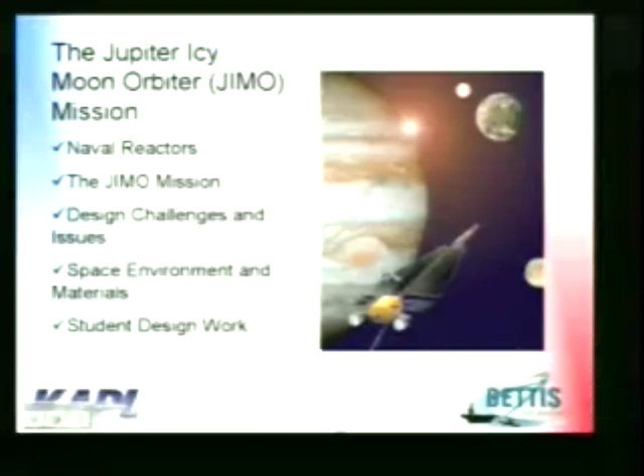Okay, naval reactors success story. At present, we have over 84 nuclear-powered ships, and most of them are submarines. The latest class is floating around. The smaller, cheaper version is the Virginia class. Well, it was the first one a couple of years ago.

The last one that I was involved in was Seawolf, which is a Bettis design. This is a KAPL design here. This is the underwater Death Star. Only a few of those were built. And we also do a lot of work at Bettis on Nimitz-class carriers. Los Angeles class has been around a while. NR-1, everyone's heard of.

Well, where are Naval Reactors facilities located? They're pretty much spread around the country. First of all, Naval Reactors headquarters is located in D.C. And there are two laboratories: Bettis in Pittsburgh and KAPL in Schenectady. These two laboratories are responsible for most of the design and engineering work.

Is the D.C. one NRL? No, that's not Naval Research Laboratory. It's Naval Reactors. They're part Navy, part DOE. It's 08. If you look at the NAVSEA command stuff, it's 08. And under DOE, it's under DOE NE. So from the Rickover days, it's a double-hatted organization.

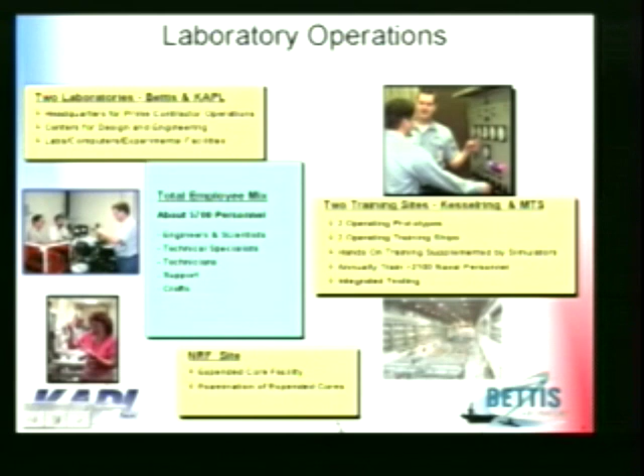Okay, the next thing I want to talk about is the JIMO mission. This is kind of a high-level overview of what JIMO is supposed to be. The plan is to launch the spacecraft no earlier than 2015. Some people say that's extremely optimistic, and I would agree. It's a very aggressive schedule. The trip to Jupiter will take approximately 6 to 9 years, depending on what velocity is at Earth's escape. If we have to spiral out, it's 9 years. If we can actually launch to escape velocity, it's something shorter.

The plan follows after the trip to Jupiter. They're planned for 4 to 6 years of science observations. We'll orbit each one of these 3 of the 61 moons, Callisto, Ganymede, and finally Europa. They're expected 4 to 6 months. They're going to orbit the science package for a while, changing orbits. And the end of the mission is somewhere in the 2025 range.

At the request of NASA, the National Research Council conducted a planetary science community assessment of what the priorities of the U.S. planetary research program should be for the next 10 years. It was called the Decadal Study. The study identified research at Jupiter as being the highest priority, and they had three objectives of this mission. One was the Jupiter Icy Moons Orbiter, and its purpose was to search for evidence of subsurface oceans on these particular 3 moons. It's also out to investigate the makeup of the moons, to learn about the history of the moons if they can, determine potential for sustaining life, not necessarily human life, but is there anything there at all. And also, they pointed out that this mission will require much more energy than you can get from an RTG or solar panels, and we'll talk a little bit more about that in a minute.

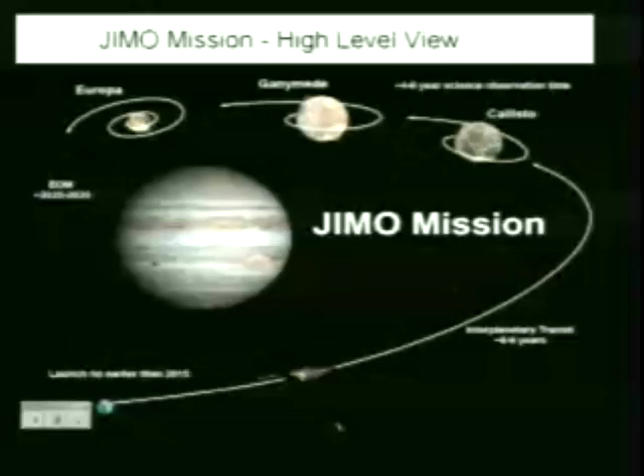Another source of power that's used a lot are RTGs. That's sending plutonium into space, always a political issue. And they're okay for low power levels. There are passive versions, there are dynamic versions where it's hooked to a Stirling engine. But again, you can get the long lives, but you can't get the high power levels. And you can't really use these for electric propulsion. There's not enough guts there, not enough oomph to keep things going. So it puts you out here in the fission energy range, ready for the deep space mission where you need electric power to get there.

I'll get this right when I'm done.

Yeah, excellent. So a little bit of background on JIMO. NASA conducted 3 Jupiter Icy Moon Tour studies between August 2002 and January 2003 to gain insight into mission concepts that would accomplish the Jupiter science objectives. The objectives were the ones we talked about before that were set out by the National Research Council in this decadal study. JPL initiated a feasibility study of a Jupiter Icy Moon orbiter mission in November 2002 and presented the results to the NASA administrator, Sean O'Keefe, in January 2003.

Included in the report was a project plan, an acquisition strategy, and contract RFPs, requests for proposals. Congress approved this in the FY03 budget, and work actually started on it in February 2003. At that time, 3 industry teams, the spacecraft vendors, were set up to go off and look at some feasibility studies. One was headed by Boeing, one by Lockheed Martin, and one by Northrop Grumman. They were supposed to do trade studies and report back on what this thing is going to look like, by December 2004. That was done early, and just last month NASA picked the prime contractor for the spacecraft, Northrop Grumman.

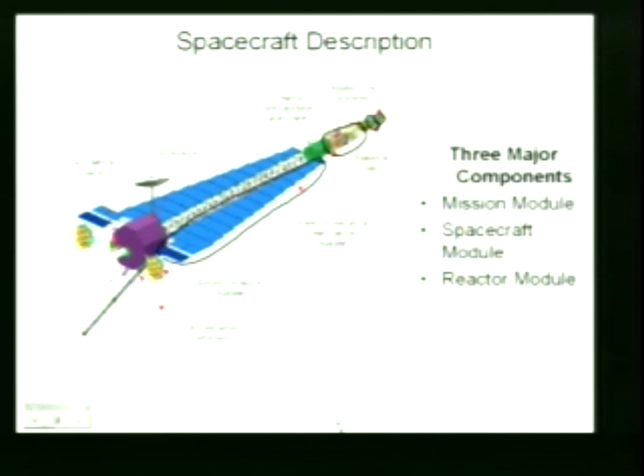And then these are radiators, all this back here. I'll talk a little more about radiators in a second because they're a major driver on weights and size. This piece back here, the mission module, is called the bus. And inside the bus is the science package, the xenon tanks; it uses xenon as its propellant.

It also has a lot of the power management and electric distribution system. It also is a place to mount all of the telecommunications things. Again, these have to lie inside the cone from the shield. And there's also the electric propulsion pods that hang off the back. So the part that Naval Reactors is responsible for is that. And we have right of refusal on a lot of these other things. This part back here is purely NASA JPL directed. They just plug into our electric grid.

There are lots of different energy conversion options that are being looked at, and we'll talk about those more in a second. Since all the heat is not converted to electricity, the radiator must be used to radiate heat to space. Okay? Space has a very, very low sink temperature. Around Earth, the sink temperature is about 200 degrees Kelvin. In deep space, it's about 5 degrees Kelvin.

Very good heat sink. The problem is it's a very poor heat transfer mechanism to get there. I've got to radiate everything, so I'm looking at T to the 4th. So that drives me to have very hot radiator temperatures to be able to dump the heat that I want to get rid of. Hot radiator temperatures bring up all kinds of problems, especially when you look at some of the designs.

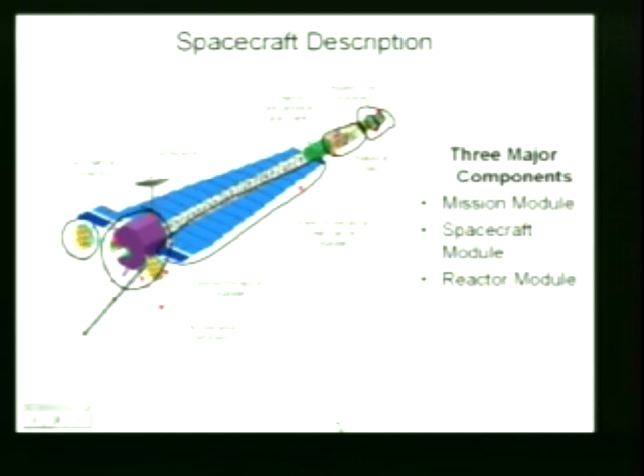Quick walk through what the power system looks like here. We have a fission reactor up front, a standard fission reactor. Neutron balance, you've got shields and reflectors and control rods to control the neutron balance. I have to transport the heat from the reactor somehow back to the power conversion system. There are a few concepts being looked at. There's a shield to protect things. Here are the heat rejection systems to throw away waste heat. This is not a 100% efficient system thermally.

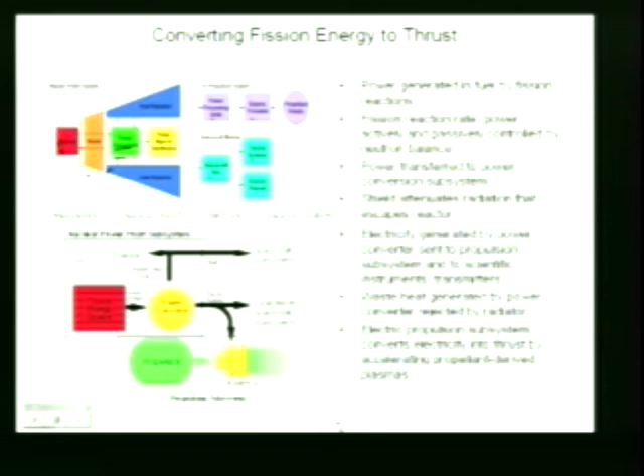Produce electric power. The electric power goes two places. It goes to the spacecraft bus, which takes care of the vehicle and the payload systems, and the rest of it goes to power processing, electric thrust, and the propellant supply there. The vehicle systems include things like the pumps, primary pumps, secondary pumps. There's another view of that on the bottom.

So some of the topic areas that we're looking at in these concepts are reactor coolants. We said there's a lot of different options. There are liquid metals. Depending on the temperature range that I think I'm going to operate in, if I'm looking at 1,300 degrees Kelvin outlet temperatures, water's not going to work there. Even in the supercritical system, you're not going to do that. So we're looking at liquid metals. The prime candidate these days for liquid metals is probably lithium.

We've also looked at gas, helium-xenon mixes for gas reactors. We've also looked at heat pipes. Los Alamos has proposed a heat pipe design where I can just use heat pipes to get heat out of the core and then set up a heat exchanger, a heat pipe to gas heat exchanger, and use that.

Core material sensitivities. There's lots of issues. This whole space reactor deal is a materials issue. There are lots of core issues. There's lots of spectrum issues. Do I want this to be a fast reactor or a thermal reactor? I probably want it to be a fast reactor because it's small. I don't have room to get moderators in there. And if I did, what form would they be in that I could keep hydrogen in something that's operating at 1,300 degrees K? Materials issue.

There are control device options. Do I want to use reflectors, sliding reflectors, control drums, control rods? To be determined. How much do I design for off-nominal conditions, transients like startups, shutdowns, power maneuvers? When we first talked to JPL, their version was, well, you turn it on, and when I get done with the mission to Jupiter, I turn it off. Well, that's a great concept. It's never really quite that simple, and you've got to look at all those off-nominal things.

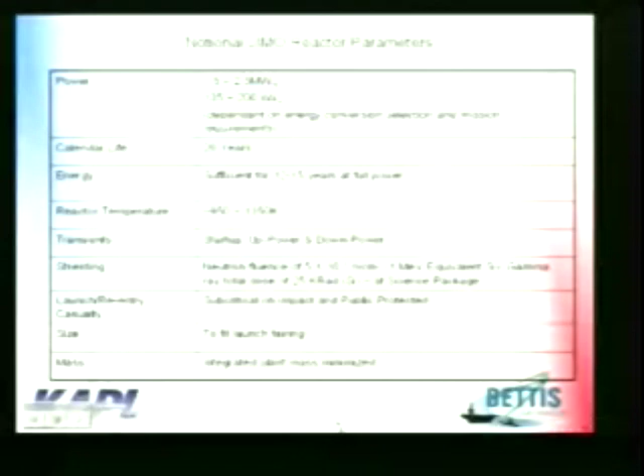So where do things kind of stand for this notion of reactor? Well, right now, according to JPL, the electric requirement is somewhere between 135 and 200 kilowatts electric on the bus coming out of the generators. It started off at 100 six months ago. It's 135 now. The guess is it'll be closer to 200 when it's finally set.

Or maybe 50 when it's finally set. If you look at RTGs, you're looking down in the tens of watts range for power levels that you're getting out of those. Depending on your energy conversion choice, you can translate this back through the efficiency. What's this mean in megawatts thermal in the reactor? Well, if you're doing a thermoelectric guy, you're looking at a 2.5 megawatt reactor. If you're looking at a Brayton system with a 30% or so efficiency, you're looking at a 0.5 megawatt reactor. Big difference, big range. What do my reactors look like when I'm looking at that kind of range?

Another thing we need to think of is 20 calendar years. It has to have enough energy to have essentially 12 to 15 effective full power years of energy in it. It's going to operate somewhere between 950 and 1350 degrees Kelvin. The material guys would like it to operate at room temperature. The reactor guys, or the energy conversion guys, would like to have it operated at 1350. Somewhere in there it's going to operate. So there are also transients. We talked about those a little bit. Startups, shutdowns, up powers and down powers.

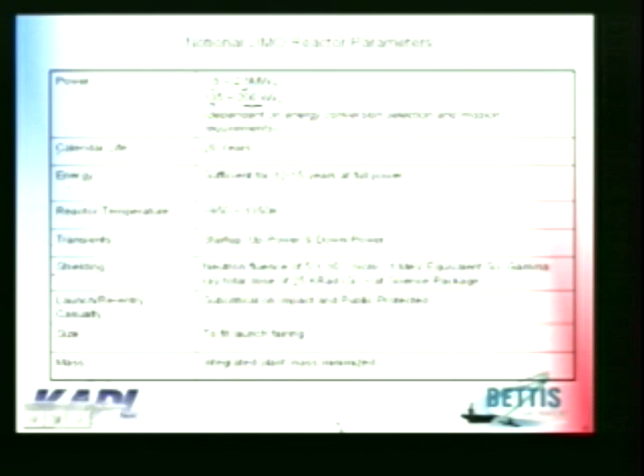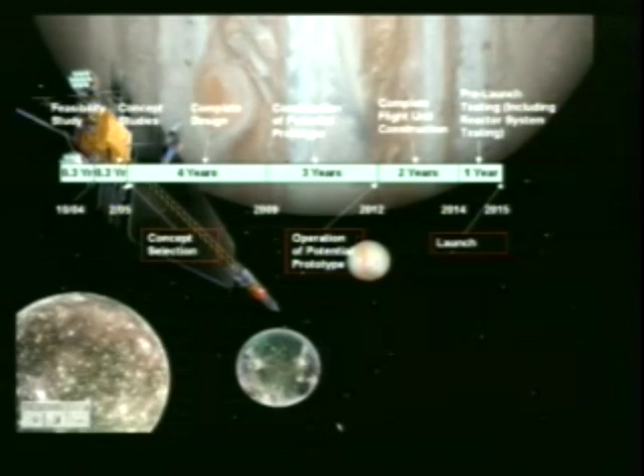Three months from now, next February, we're going to be talking about down selecting on these concepts. We had 3 or 4 energy conversion options. We have 3 or 4 different reactor options. We have 3 or 4, 5, 6, 10 power level options. Hopefully that will be narrowed down sometime in the February time range. The plan at the moment is to get to 2 concepts, a concept and a backup concept, and then actually go off and do the nuts and bolts design work to get there. At that time, we'll work on the design work. We'll talk about this in a second, and complete the flight unit somewhere in the 2012, 2014 range with a 2015 launch date. Very aggressive schedule.

You see in here that we're talking about maybe there should be a prototype. This isn't cast in stone. There may be one. There may not be one. SP100 chose to have one. It never really got built. Their experience with it was that by the time they got it to meet all the rules for land-based reactors, they weren't going to learn anything from it. Naval reactors have a long history of building prototypes. We've had them in Idaho, we've had them in Kesselring. S1W was built before Nautilus and preceded Nautilus, and we also had A1W, which preceded the aircraft carrier reactors on Enterprise. We've gotten a lot of good information from them.

Lots of things show up that are unexpected. Gives you a chance to diagnose them, to look at life and aging issues, to come up with fixes before, in our case, the ship ran into the same problem. And it also points up a lot of materials issues. Problem here is you're not going to learn a whole lot with a prototype. And there's also the issue of I can't mimic zero gravity, vacuum, 5-degree Kelvin atmosphere on Earth. So do I really learn anything from that? Don't know. That's up in the air, still to be determined. Reactor issues. I'll talk a little more about specific reactor issues in the nuclear engineering department.

Mentioned some of these before. Things that are on the plate are: what's this reactor going to be? It's going to be liquid metal cooled. It's going to be heat pipe cooled. No heat pipes on it. Or gas cooled. Energy conversion options are Brayton, Stirling, Rankine, thermoelectric, thermionics.

Heat rejection system, these big radiators that are sitting out there. They're going to be pumped loops. They're going to have heat pipes. We're going to rely on some kind of two-phase flow in these to help get the heat out there. What temperature are they going to be? Intermediate temperature or high temperature?

The low efficiency energy conversion options have very high temperature radiators. The others are higher efficiency. They're lower temperature radiators, but they're much bigger because they're at lower temperature. They're smaller because they're rejecting less heat. You got to play the trade game.

Also, things they're trying to figure out: is it going to be an AC or DC electric system? It makes a difference, and it could determine which of these you're going to look at. Also, is it going to be a high voltage or low voltage system? Don't know. The interesting part is you can take this whole spacecraft and you're going to fold it up to try and fit in this fairing.

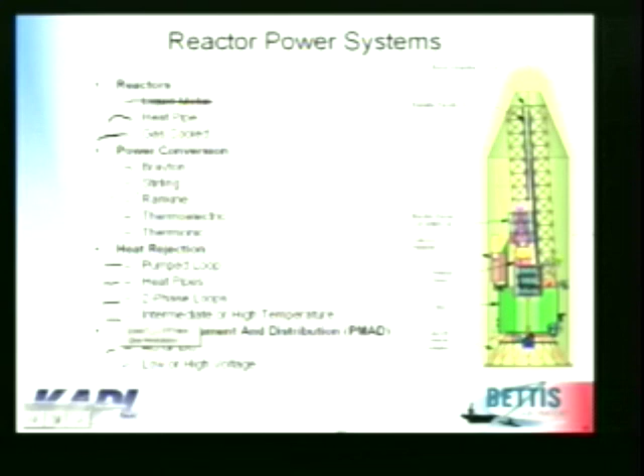You can see here's the bus, here's the boom. For practical lengths, that boom is about 30 meters or so when it's extended. The power conversion units, reactor shield, the reactor sitting down here in some kind of nice cage. This shakes a lot when you launch it. So you've got to design for shock loads, but only for about 45 seconds. So that's kind of some of those issues.

There are also some other challenges. We talked a little bit about launch limitations on size and weight. It's a fairing issue. It's a launch vehicle capability issue. Like I said, if the Saturns were in existence today, that wouldn't even be on the chart.

Nuclear electric thrust limitations. The thrust from an ion engine is low, but you can do it for a long time because it's a very efficient system. The force you get out of an ion engine is about the same as the force of a sheet of paper laying on your hand. It's not very much, but apply that over 10 years, you get a lot of acceleration out of that, F equals

Vacuum is an issue for lots of areas, some that you wouldn't expect. Electronics cooling. When you've got a box of electronics sitting somewhere in a control system, you usually depend on air convection to cool it. Can't do that here, so it's all got to be actively cooled.

Lubricants are an issue. In vacuum, lubricants tend to off-gas things. If you have a lubricant that off-gases oxygen, and you get oxygen into a liquid metal system, you get oxides forming, or if you have refractories floating around, oxygen and refractory metals at high temperatures are a very bad combination. Launch loads we talked about.

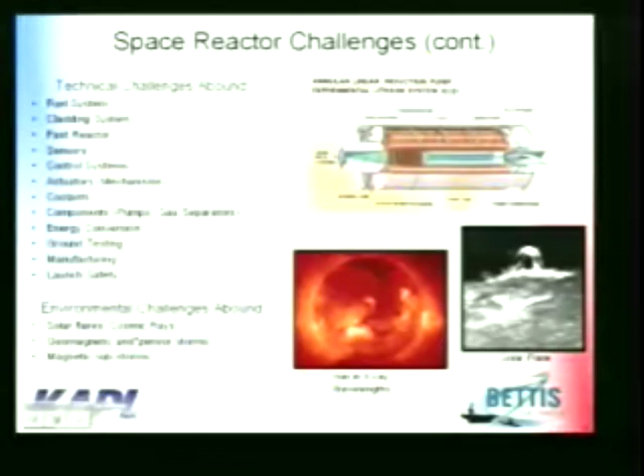Micrometeoroids are an issue. This thing's being shot at with all kinds of micrometeorites all the time. So you've got to armor it. Radiation environment is an issue. If we have time, we'll talk about that. And you have no chance for maintenance. There are other challenges: fuel system, the cladding. It's a fast reactor. We don't have tons of experience with fast reactors.

Control systems we talked about. Actuators: there are mechanisms, rod drive mechanisms or slider mechanisms. We're looking at very fine tuning. We're looking at a reactor that's on, stays on, runs all the time. So the only thing you have to compensate for is depletion. So I'm looking at 6 or 7% burnup. So I don't have to move my rods very much.

Well, actually you do, because you're in a vacuum environment. I've got to worry about vacuum welding. So occasionally I'm going to have to tweak these things just to make sure they still work. So you have to think about that. Coolants are an issue. Talked about a lot of these. There are new components that we haven't talked about before.

Electromagnetic pumps, ALIPs. Not a lot of people building those these days. Who's going to build them? What kind of quality assurance do you need? How are these going to operate in space? I've got to be able to cool because I have 1,300-degree coolant going through them, or 1,100 if I'm in the cold leg. So there are issues there on where's the infrastructure? A lot of this is infrastructure issues.

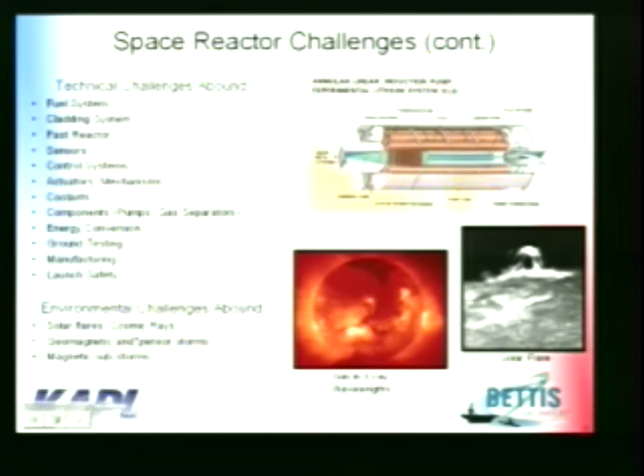Gas separators. If I've got a lithium coolant, I irradiate lithium, I get helium in the coolant. I've got to get that out of there because if I have gas flowing through an EM pump, it's not going to work. So there are issues there. Things that need to be designed. Energy conversion, ground testing, launch safety. The environment: here we're talking about solar flares, geomagnetic storms, meteor storms, and magnetic substorms. Hopefully we'll have time to get to that.

So some of the key issues: radiation and micrometeoroid environment. They consume time and cost because I have to design in redundancy, if I want to just put them out there and have 10 of them so I can get by on the mission if 2 fail. Or I can armor these things, which costs me in weight. Weight and cost, either way, you're going to lose on that one. So you've got to be imaginative on how you do that.

Mass constraints by the nuclear propulsion system. The propulsion system gives you so much F; it's F equals ma. If I go up in mass, I go down in acceleration, the trip takes longer. The dimensions of the payload and the fairing are an issue. We talked about that a little bit. And design analysis and the ability to protect the public. Safety is a big issue on this.

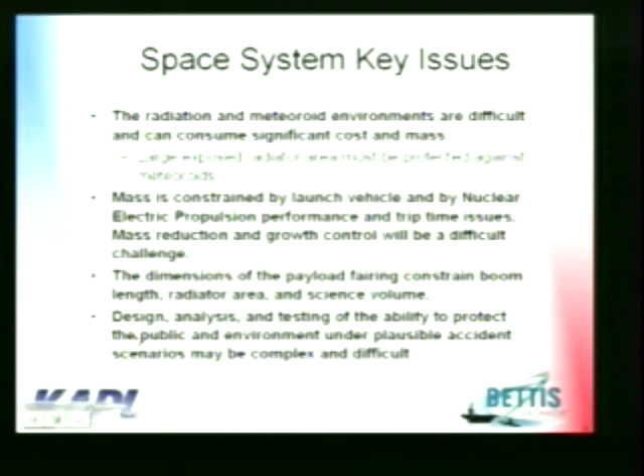There's been lots of issues in the past about launching RTGs, and there were always protesters out. First time we went to JPL back in March to get our Space Reactors 101 class, the day we left, they had their first protester for this project out in front of the gate. So it starts early. And the bottom line is that NASA and Naval Reactors and DOE have to do a good job of selling the safety. That's always been true for nuclear power.

One of the things the materials guys want to do is reduce the outlet temperature, just because colder is better from a materials guy's standpoint. What's it going to cost you? Well, if I do that, here are the two leading concepts: the thermoelectric static converter and the Brayton cycle. This is kind of the radiator surface temperatures we're looking at. For these, around 500 degrees Kelvin. For those, about 800 degrees Kelvin.

If I reduce reactor temperature, I reduce efficiency. Everything goes up. Boom, the size of my radiator, the area goes up. So I have to play the trade game here. I may not be able to get this in the launch fairing. There's trade-off studies that need to be done.

Kind of an idea what's going on. This is like the reactor module. This is for the heat pipe reactor. Here's a reactor, 3 heat exchangers, heat pipes run down here, back to the secondary side, Brayton engines, closed-cycle Brayton engines, and radiators.

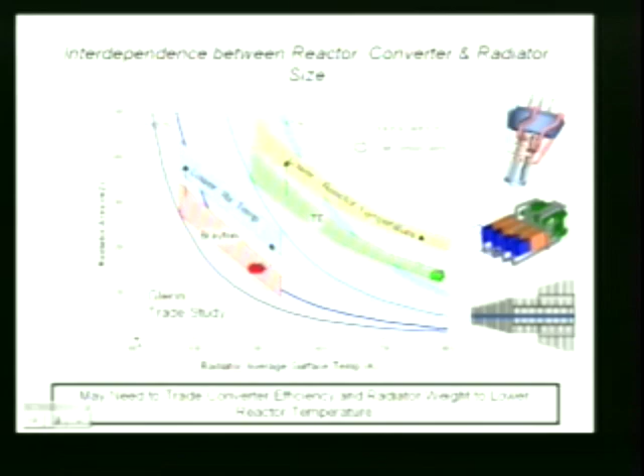The issues are pretty obvious. Long times at high temperatures for materials; high neutron fluences can affect material properties. We don't know that. Wear and binding of moving parts, effects of vacuum and high temperatures. Uncertain mission demands. Once it's out there, we don't know what it's going to be doing for 20 years. May want to shut it down, turn it around, slow it down, run at some lower power level. Don't know what that looks like yet. That affects your control system a lot.

Assuring sufficient shutdown reactivity for subcriticality on launch accidents. When this thing does dump into the ocean, I don't want it to be supercritical, but I've got to put enough excess reactivity in it that it's going to last for 20 years.

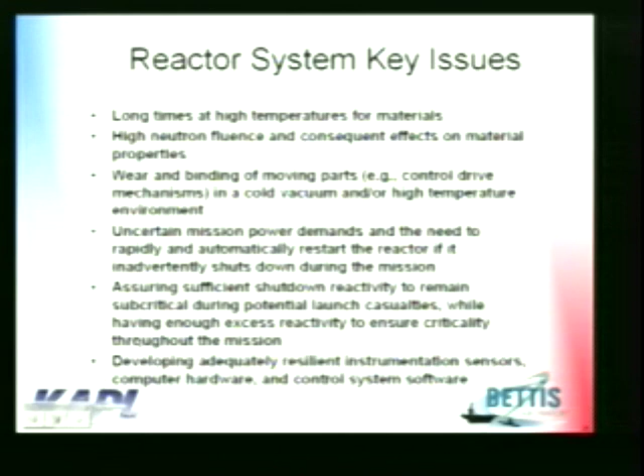Okay, and I also need to come up with resilient instrumentation. Here are the launch accident issues. We worry about things like propellant fires on the launch pad, propellant explosions on the launch pad. The main thing here is to protect the public and the environment from radioactivity and chemically toxic elements. There's lots of them in there. Beryllium reflectors are a chemically toxic substance.

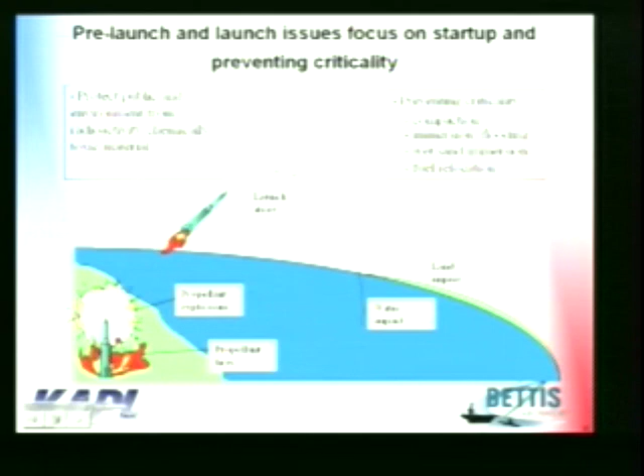You also have to worry about landing in the water, in the ocean or on land somewhere. There are compaction accidents. Don't want to compact this thing; you might get a criticality due to that. You have to worry about spectral shift. If I dump this into the water, I've got a fast reactor that's looking at moderation. That's usually a bad thing from a reactivity standpoint. And I would also have to look at things like wet sand. It may be a better reflector than water. Oh, and fuel relocation if it does come apart.

Space environment. The big topic here is, where's all the radiation come from? Well, there are solar flares and solar winds, and there are photons and heavier ions coming from the sun. There's interplanetary cosmic rays. Lots of things get trapped either in the Earth or in Jupiter's orbit that you have to live through. A lot of this is based on what scientists think. There's some data on some of this stuff. It's estimated that about 75% of the radiation that impacts the spacecraft will come from the environment, only 25% from the reactor.

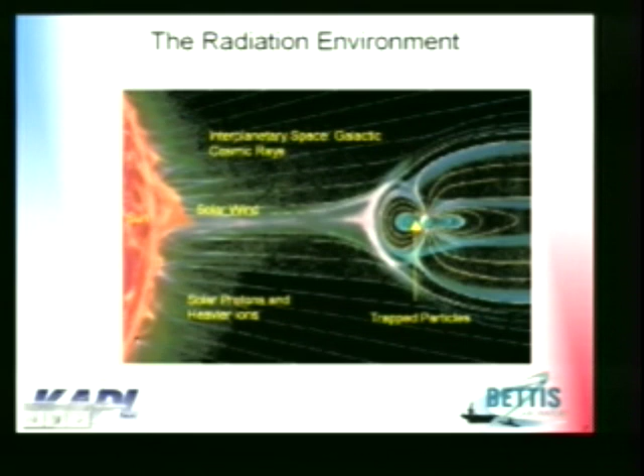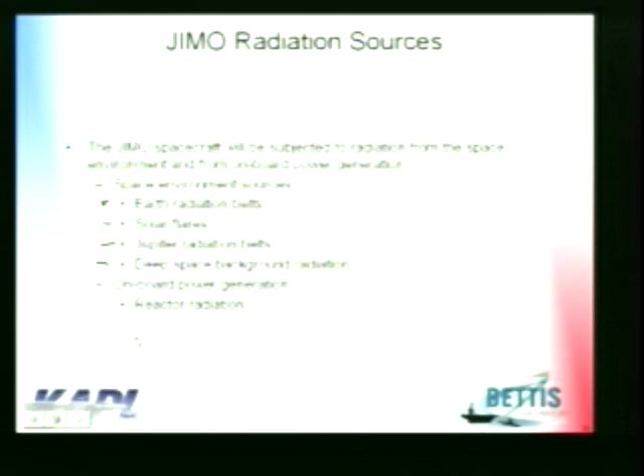Just take a look at this picture. On the sun side, this trapped particle field comes out about 10 Earth radii and about 200 on the other side. It's even bigger on Jupiter, where the cosmic rays get trapped. Okay, what kind of radiation makes up most of these fields? Well, where's it coming from? The Earth's radiation belts are the near Earth sources. Solar flares when you get out away from the Earth, and on the trip to Jupiter you get into the Jupiter radiation belts when you get there. And you also have deep space background, which is beating on you all the time. And there's also an onboard power generation source, so you do get some radiation from the reactor. I'll show you what kinds of radiation here in a second.

When you're in the Earth's radiation belt, if there's not enough launch power to escape, and you've got to spiral out, turn on the engines, run around the Earth for 2 years until you get enough escape velocity to head off to Jupiter, you're going to be hit with protons and electrons. We're talking 100 MeV protons. Trucking along, they're not little guys. Solar flares will give you protons and heavy ions. Jupiter's radiation belts, you get all these and heavy ions. These ions go up as heavy as iron. So that's a bullet coming at you. And there's always deep space radiation, which is usually heavy ions.

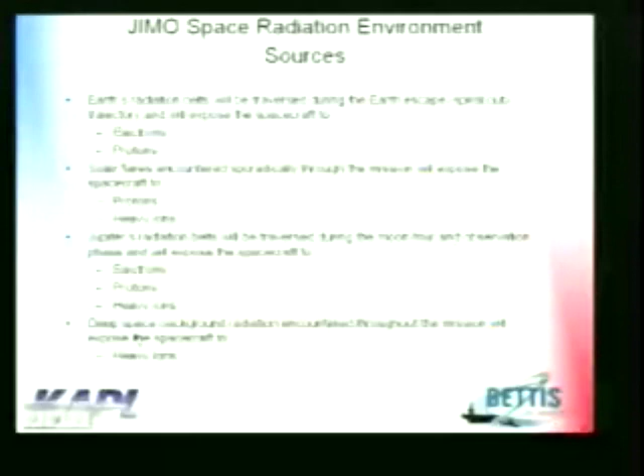There is some data that was taken from spacecraft on their way to Saturn or outer planets: the Ulysses spacecraft in 1992, Pioneer 10 and 11 in 73 and 74, and the Voyager spacecraft in 79. Here is one piece of information. The Jovian radiation atmosphere gave the Galileo spacecraft more than 4 times the radiation it was designed to withstand. The intensity caused failures in the computer circuitry on Galileo. This caused the computer to switch to backup and shut down. Once Galileo cleared the Jupiter radiation fields, it came back to life again. So they healed. There was some annealing going on.

Materials issues. In the world of materials, thermodynamics rule. You have to have your fuel system chemically and thermally stable, because you're going to be changing the temperature here. For the fuel system, you need dimensional stability and chemical stability. You don't want to be dissolving the fuel pellet if you get a leak from the clad. We also need tough, ductile, fabricable materials. Some of these concepts have very complex geometries. I want something I can actually make, not something that's going to break or crack under stresses. And I also need radiation-tolerant electronics.

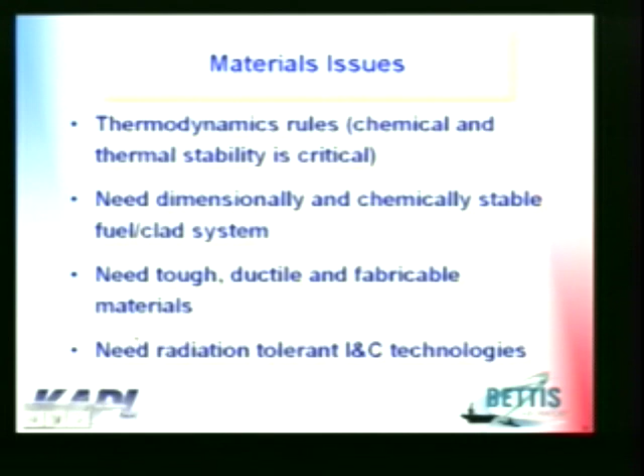Fuel issues. The major fuels that we're looking at are uranium nitride. It's very high uranium density, which is good for a fast reactor. Has high thermal conductivity, which is always a good thing. But it's got a low chemical stability. Not a good thing. Actually, the database here is rather small. EBR-II has most of the database, and it's pretty small.

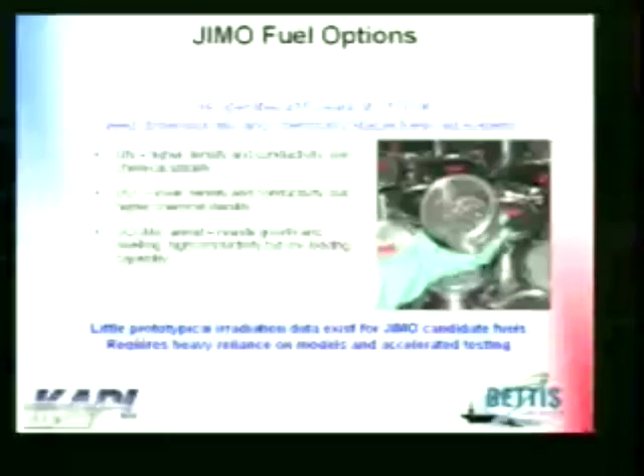UO2, we know a lot about UO2. Low density, low uranium density, low thermal conductivity, not good things, but it's very stable. Now, the fuel system we're looking at is UO2 moly cermets. Cermet's kind of a ceramic with the fuel in there. They resist growth and swelling, have high conductivity, but you can't get the uranium density up very high. And again, big issue here is not a large database on any of those.

Okay, student design work. Lots of things we're looking at. Operation in the Earth's biosphere. We're looking at the differences between space applications and terrestrial applications. Here, obviously, a non-issue for space. It's an issue for terrestrial stuff, reentry and launch accidents, risk, remote setup, lots of different areas where student design projects could be done. And so you need to consider looking at some of those.

And here are some potential design projects. Look at some of the energy conversion systems and radiator trade-offs, alternate shielding materials, alternate fuel enrichment. We're looking at 93% uranium here. You can't use plutonium. It's an international treaty. Reactor dynamics. How do these systems work dynamically?

Assuring safety issues, subcriticality. Control mechanisms. Is there something besides control rods, sliders, and drums? Is there another way to do that? Any kind of new reactor concepts. Reduced fuel temperature is always a good thing, and there's lots of bright people in school these days. I'm sure there are other things there. So after that quick rush through, again, are there any questions? We have time for questions and comments.